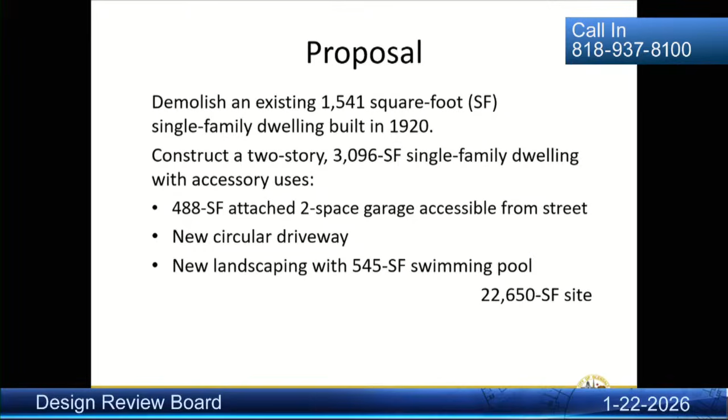The applicant, Helbert Moradian of K&M Engineering and Design, proposes to demolish an existing 1,500 square foot single-family dwelling built in 1920 and construct a new two-story, 3,100 square foot single-family dwelling with an attached 488 square foot parking garage, a new circular driveway, new landscaping, and a swimming pool, all on the 22,000 square foot site.

The project qualifies as a Class 3 new construction exemption pursuant to Section 15303 of the state CEQA guidelines because it consists of one new single-family residence. Additionally, the property and existing residence does not appear eligible for historic designation and is not considered a historic resource under CEQA. The subject project is in North Glendale, La Crescenta Community Plan area.

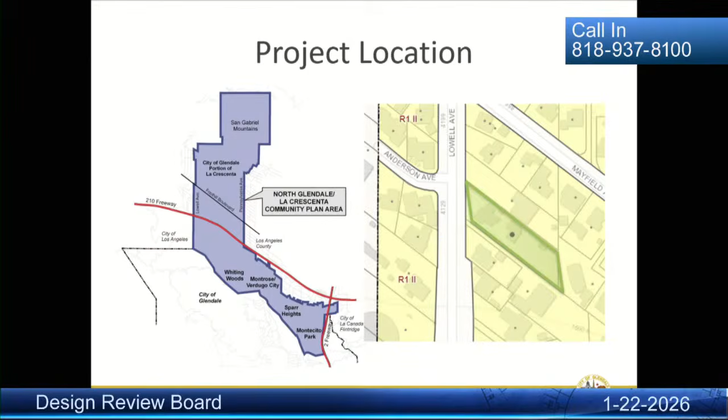The property at 4124 Lowell is in a low-density R1 zone, floor area ratio District 2. The lot features a gentle slope and is parallelogram shaped. The neighborhood consists mostly of a mix of one-story and some two-story single-family residences with varied setbacks, massing, and architectural styles.

The community plan promotes preserving this diversity and neighborhood scale. Looking at the existing site plan, buildings and structures to be demolished include the existing residence, the freestanding and retaining walls, the patio, garages, and driveway.

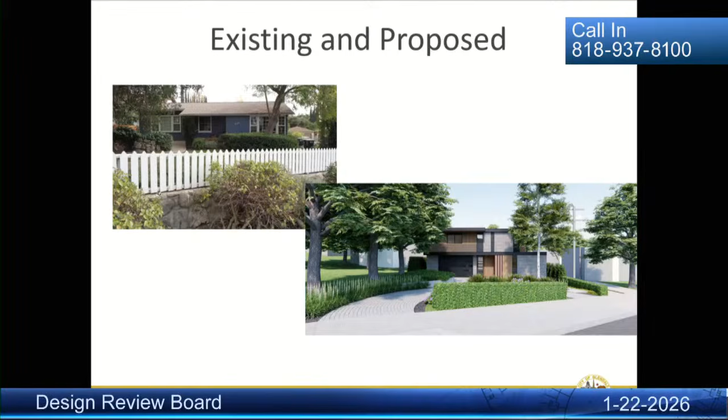Looking from the street, existing and proposed: the existing house is an eclectic style, which blends elements from different historical periods, a trend that began in the late 19th century. The new residence reflects a clean, contemporary style with rustic elements, continuing the eclectic tradition of blending diverse influences. Both approaches complement the neighborhood's character and echo the natural stone aesthetics found throughout Crescenta Highlands.

This is an example of the site plan, which the applicant will get into more detail with, and a preview of the elevation, which the applicant will also detail. As far as determination of compatibility, the staff report outlines this in three ways: site planning, mass and scale, and design and detail. Just a brief summary of the findings in the staff report.

For site planning, the footprint increases by about 34%. The lot coverage increases about 87%, particularly because of the rear deck in the back. The setback is similar—it's a 26-foot front yard setback, so the house is positioned in a similar front compared to the current house.

The design meets the slightly sloping terrain. It's a gentle slope, and structures stay in their original position to minimize grading. There is new landscaping, and there'll be a new swimming pool in the back. It'll be an open front yard with no structures, no gates, no fences in the front.

There will be a circular driveway, but the lot is wide enough to accommodate that, with permeable pavers and such. There will be a 36-inch tall retaining wall in the front yard finished with natural materials. There'll also be a couple of street trees replaced, with oak trees preserved.

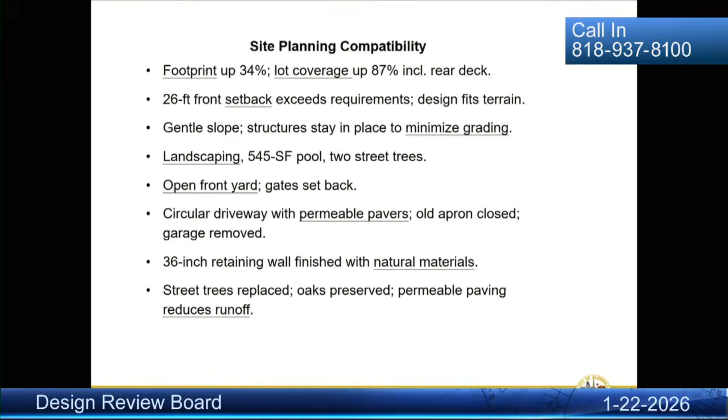For massing and scale, we'll have a two-story home scaled for neighborhood compatibility. The contemporary modern design will have low-pitched roofs and long eaves. It'll follow the slope, with the taller first floor offset by some spacing and setbacks. The massing is softened by horizontal lines and metal fascia.

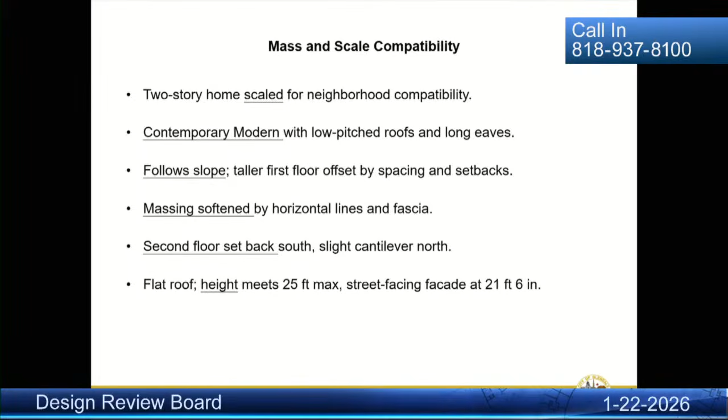The second floor is set back a little to the south on top, and you'll see it slightly cantilevers north for a gradual transition. There's a flat roof design that meets the maximum height of 25 feet. On the street-facing facade, the wall is actually 21 feet high, and it slopes a bit in the back, so the house appears smaller in front than in the back.

In design and detail, there's a contemporary style with rustic finishes - porcelain tile, wood siding, aluminum fascia. These are high-quality materials. The windows and doors have recessed frames, solid wood entry, and the materials are generally composite wood, aluminum, and porcelain tiles.

Outdoor features include a front porch, rear balcony, and a deck on the first floor, all positioned to avoid privacy impacts. There's a circular driveway with permeable pavers. Exterior lighting will be minimal and consistent with the design, and the plans will eventually be updated to show mechanical and utility elements.

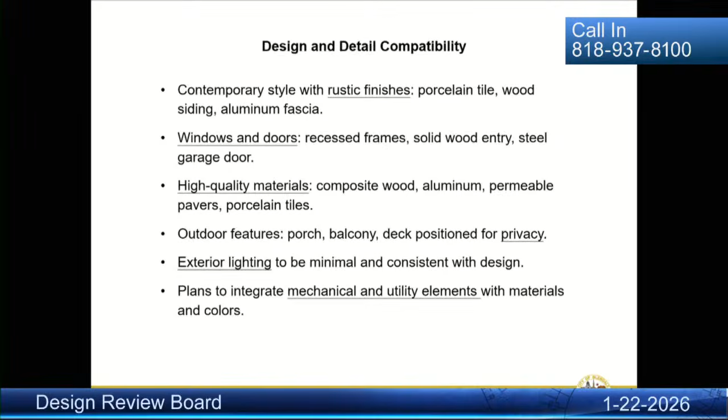There was one comment I received just yesterday. The comment came by phone call - Ara by phone needed to know about the location of the new residence and wanted to be assured that the second floor windows would be located in such a way to avoid privacy impact. I had emailed the plans to that person. That's the only comment received.

City departments provided normal, standard comments, which are reflected in the staff report and exhibits. For staff recommendation, given all the information presented here and in the staff report, staff recommends that this entitlement for design review be approved with the following conditions. Number one, that the applicant complies with the recommendations identified in the comments from the responsible agencies found in the exhibit. Number two, that there'll be some revisions to plans before plan check, involving four items.

Just to make sure that the structures - any columns, walls, fences, or gates - there was some inconsistency in the plans. Some sheets showed them and some didn't, so we wanted to make sure we're consistent with that.

Secondly, that the retaining wall should show natural finishes, like natural stone. Third, that exterior lighting be included, kept minimal and consistent with the style, and limited to entry, egress, and vehicle areas. And lastly, that mechanical equipment, gutters, vents, and utilities be shown and integrated into the design. This concludes my presentation.

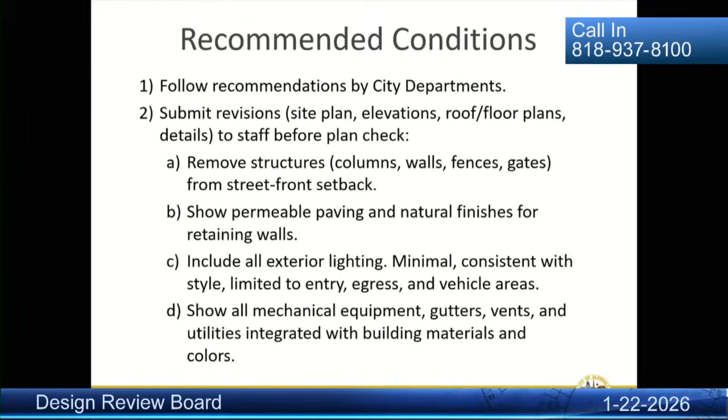I'm available for questions. Thank you. Any questions? I have one question.

Historically, the design guidelines have discouraged circular driveways, so I'm curious on what basis you're saying this one is okay. Can you clarify if that's in the guidelines? I perhaps missed that detail. Is it in the primary guidelines for single family, or is it in the La Crescenta guidelines? I can't speak to La Crescenta in particular, but it is in the generic design guidelines for the city.

I think, as I understand, that's true, and generally we want to discourage circular driveways. In general, our zoning code provides for them, however. Usually lots that are at least 80 feet wide start to be able to accommodate that, because they're wide enough. As long as, in accommodating a circular driveway, it meets the intent where we provide landscaping and an open yard, then that's why I thought we could accommodate it.

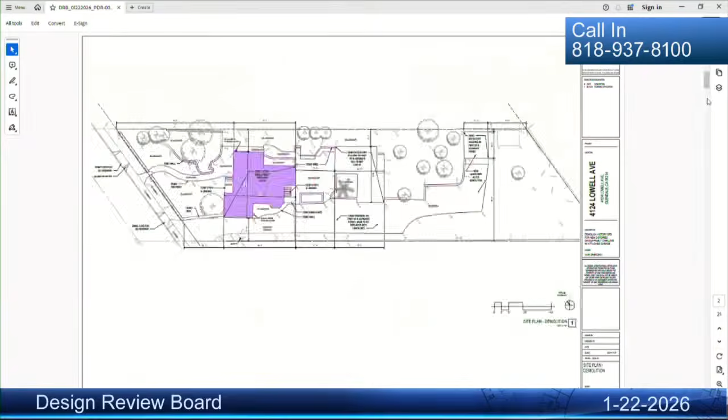Yeah, it says here, front property line 80.59 feet. Can you tell me... well, okay, so that's the length of the facade, but the actual width of the lot is...

Because that's at an angle, if you actually measure from side property line to side property line, it's less. So that's where I'm confused about how we define the width of a lot.

The width of the lot is defined in the R1 zone as the front property line. So even though the lot itself is not that wide, it's defined by that dimension. Okay, all right, that's a good point to clarify though, for sure.

Okay, thank you, thank you. So basically, it becomes a design discussion.

Any other questions? No. Nope. Okay.

We'll go into the public portion now. Let me see, I only have one speaker card for this project. It's Ricardo Mora, is that the only one who's going to speak for this project? Is he the applicant? He's the architect.

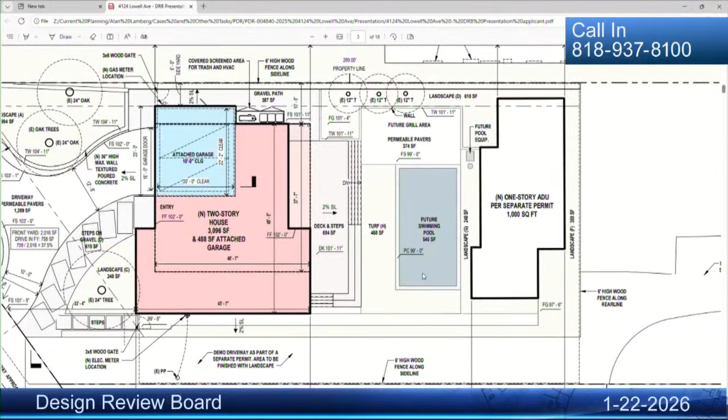Basically, what you see as blue is the garage, and red is the house, and the house on the second floor overlaps the garage. Towards the back, we have a terrace, stepped down to the existing topography where we'll in the future build a pool. The house is built with this stepped layout, so we didn't have to do any grading or build retaining walls. If you go to the next slide, please.

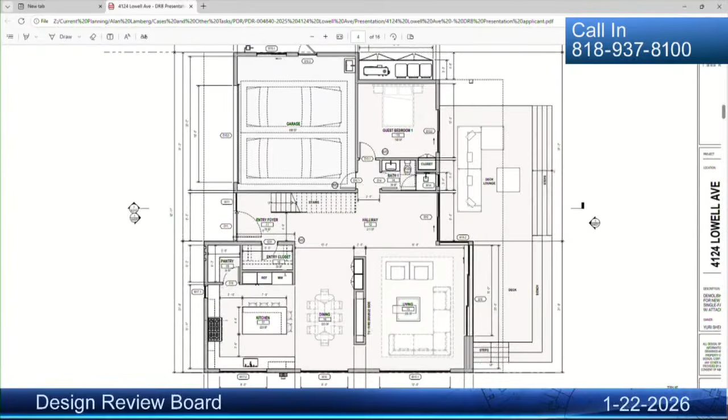I'll go quickly through the floor plans. I want to focus on the renderings, as they illustrate the house better. The floor plan organizes with the garage to the left, to be less visually impactful from the main street. On the center, you have access with the entry, stairs, connecting to the back. On the right side, you have the kitchen, living room, dining room, and so forth. If you go to the next plan, please.

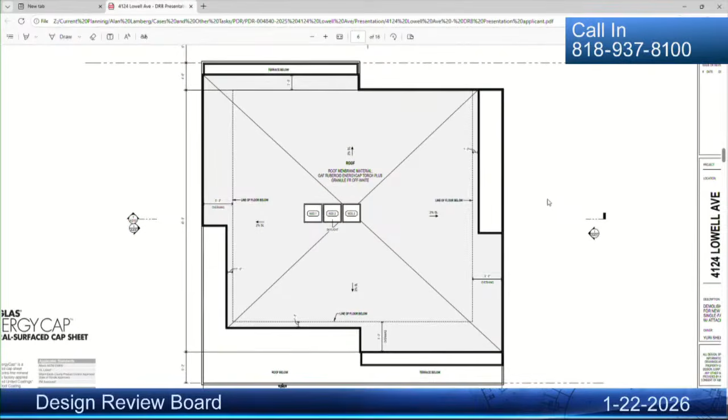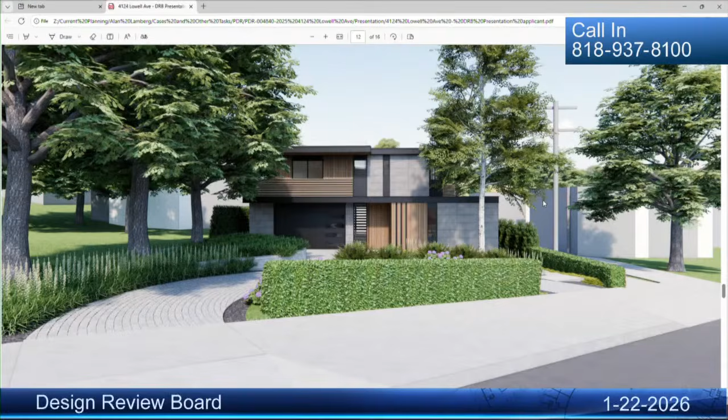I'll conclude quickly. If you could show the rendering of the front. I want to talk about how the house is designed, taking into consideration a 360 design. The same design travels along all sides of the house with the same elements, the same wood material, the porcelain tiles that look like concrete panels, and the metal detail travels all around the same way. If you keep scrolling through the renderings to illustrate that. This is a more detailed view of the entry door. You'll see the entry is more prominent than the garage, which is also behind the overhang, so you don't see it as much.

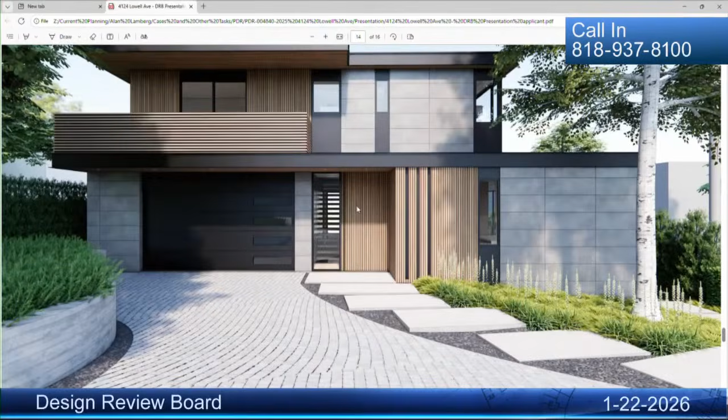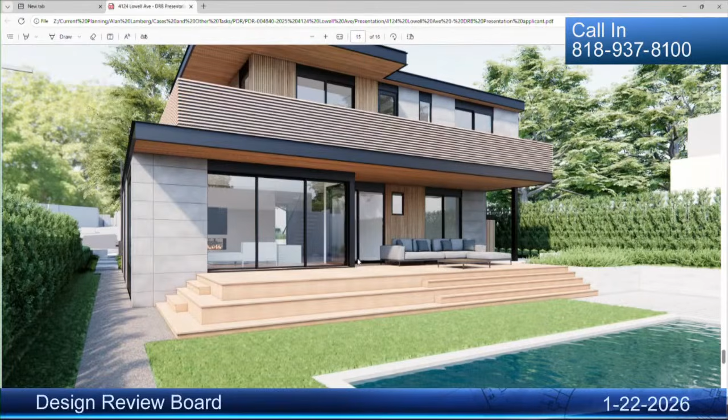Another view of the front. We'll integrate the lighting with this design. This is a view of the back, so you can see it's the same language, front and back. You can also see how the house terraces down to mitigate grading. All the windows have a recessed detail. Although the house has these balconies all around, it's a solid baluster, but detailed in a way that it almost looks open and transparent. Another view of the back. This is the place where we're going to have the trash enclosure and the mechanical equipment, all screened with this wood detail as well.

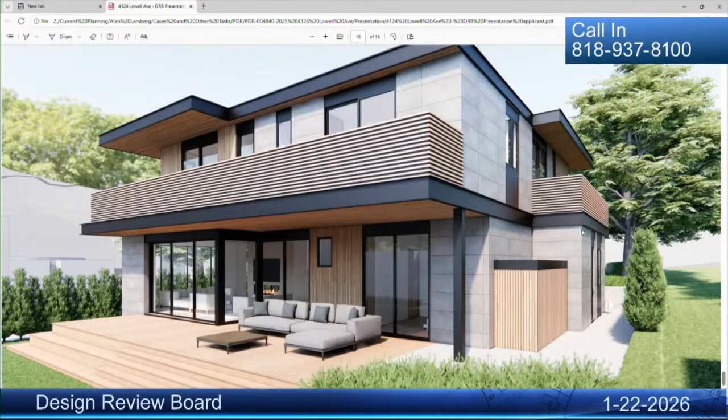So just because you ended with that, the enclosure there, is that going to be permeable so you can actually see through it, or solid with just fluting on it? It's solid. It's open on the bottom for drainage, but it's tongue and groove wood against wood.

So I wanted to talk about the trees. If I'm hearing correctly, all of the oak trees and the other tree, which I believe was a jacaranda tree, are all going to be preserved? Correct. So no removals of any trees? No.

The site plan has everything front-loaded on the lot here, but right now there's a big driveway and a garage in the way back. What's the plan for the way back area? There is a plan for a lot subdivision.

So eventually it'd be subdivided into another property. What about a driveway access for back there? Would there be... It's pretty much the current driveway, which looks just like a walking pathway here, but it's actually wide enough to have a full driveway down there? Correct.

What's the dimension? I can't tell from the plans. We will have the 20 feet required for legal frontage to the street and access for the fire department. We had that on the plans at a certain point, but it became confusing to mix a future project with the current project, so we were asked to take it out. That will be part of a separate application.

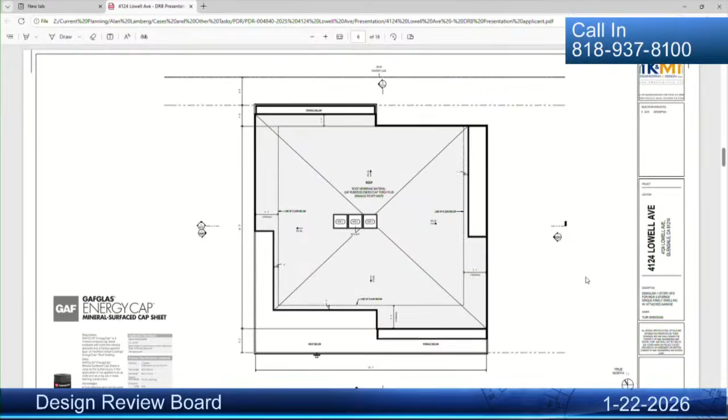As far as the mechanical room area where you have the wood fascia, it's open top, correct? That enclosed space will need ventilation. Yeah, we want to cover as much as we can—it's easier to maintain if it doesn't rain straight in, but we'll need ventilation for the HVAC, the condenser that's going there.

So is the water heater and the condensers going there? Is that what it is? The water heater most likely will go inside the garage. Okay.

We might be looking at not having enough space for all of it. I'm looking at your A200 - it looks like it's the condensers, but it's not identified, so it's kind of hard to tell. We're guessing here. So do you have the trash and the condenser? Is that what it is? Okay, yeah, that makes sense now.

And then a final question regarding the entrance - you're proposing textured poured concrete at the planter. Are you saying this is going to be a board form finish? Is that okay for the retaining wall on the back? So my question is, it's largely an existing wall. We are reshaping it to accommodate the driveway, so rebuilding a portion of it.

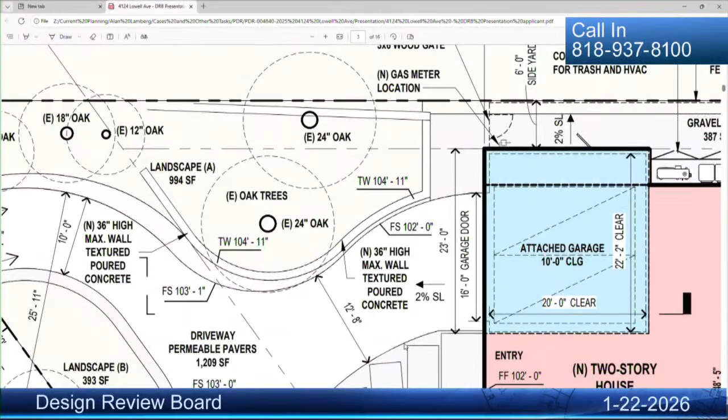Okay, I'm trying to imagine how you can do a board form on an existing wall. No, sorry - we're cutting a portion of the existing wall because we need to push it to a different location, and then rebuilding as new. Okay, yeah, all right, thank you.

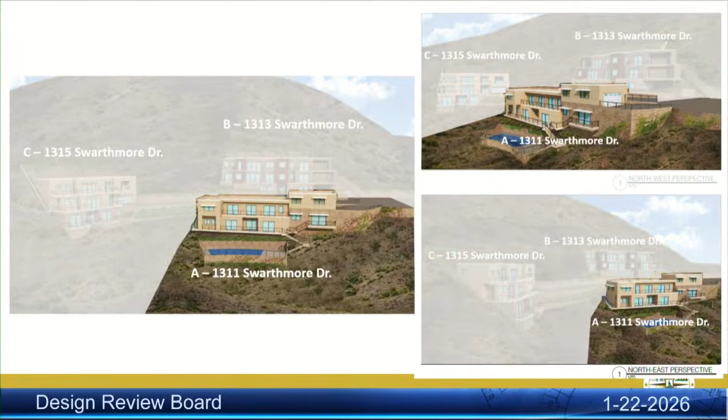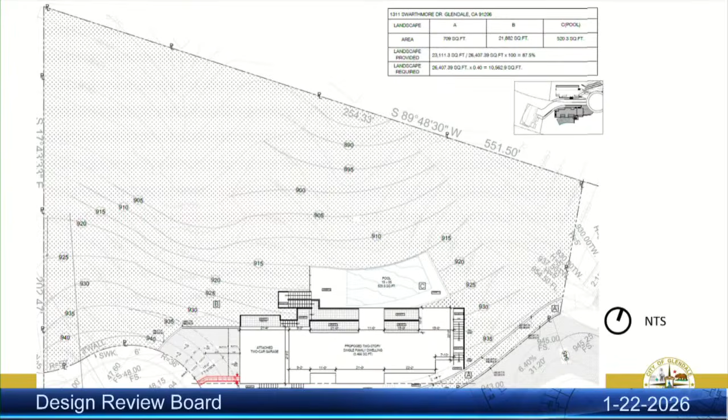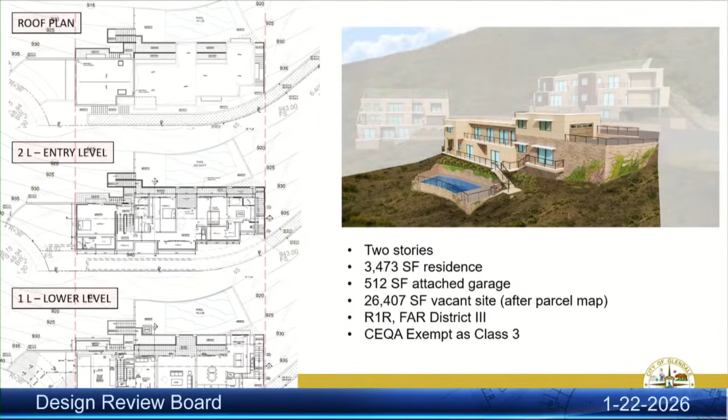Starting with Parcel A at 1311 Swarthmore Drive, it has a downslope topography. The house and deck are terraced to follow the downslope. The site plan features excessive hardscape in the front that staff recommends adding additional landscape to, highlighted in red. The landscape plan features drought-tolerant plants, including coast live oak trees. It's a 2-story residence going downslope to diminish the massing visible from the street.

Here are the elevations. The building itself is 29 feet in total height.

And it's designed with the various setbacks. The entry is well integrated into the design of the residence. It's not monumental, however, the staff recommends restudying the feature to provide a better focal point.

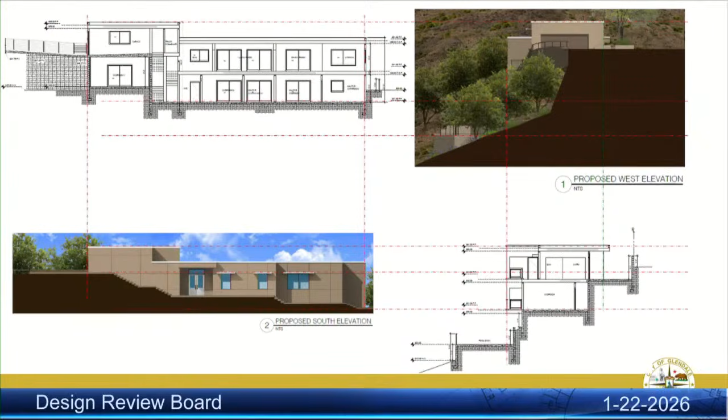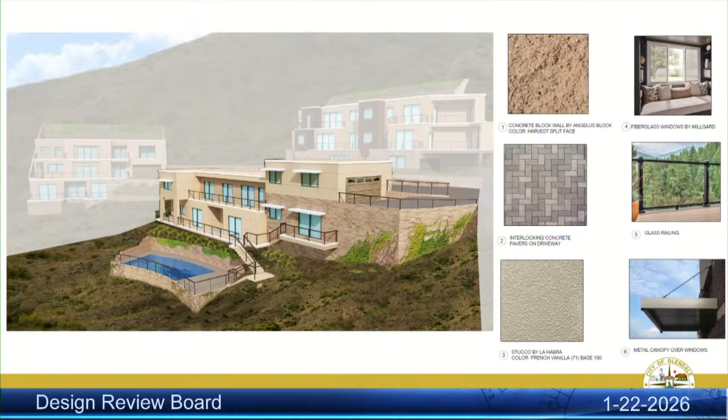Finished materials are of high quality and reinforce the contemporary design. However, staff would recommend some additional information on the stucco color and the additional block material to be incorporated into the design where it's more visible and prominent from the street.

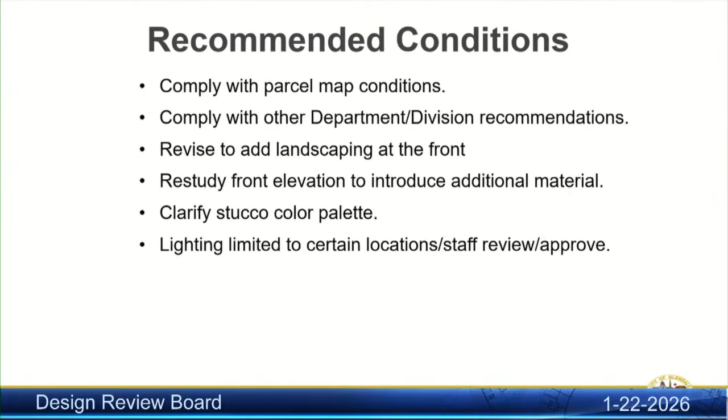So here are the complete recommendations from staff: comply with the parcel map conditions, comply with the other department division recommendations, revise to add additional landscape at the front, restudy the front elevation to introduce the additional material, clarify the stucco color palette, and include lighting limited to certain locations that staff would approve. That concludes this presentation for 1311 Swarthmore. Thank you.

All right, good evening. We're going to transition to 1313 Swarthmore. You mean 1315? I'm sorry, 1315, yes. Speak that one. No, it's, no, it is 1313. Okay, yeah.

So the next item on the agenda is PDR 004510-2025, a review of a proposal. All right, Roger. Yes, over here in front of us, just so we have 1311, 1315, and 1317.

Okay. Where's the? Yeah, so we should have 1317, should be, I'm assuming, is typoed to 1313. Basically, is it the one at the back, or is it the higher side? Sorry, let's jump to Alan then. Okay, well, yeah, let's jump to Alan.

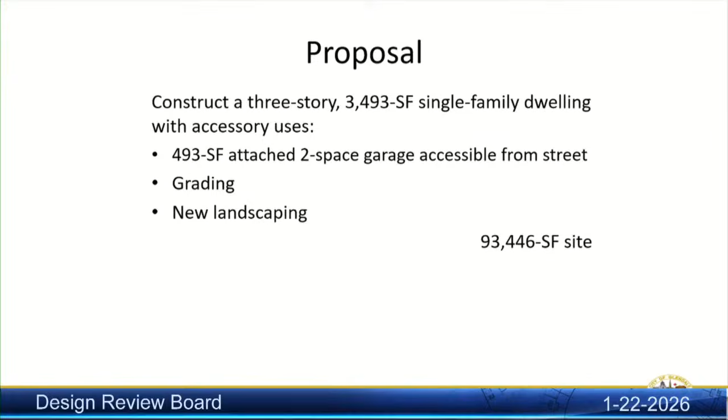The applicant, Edward Hagobi and Associates Architects, proposes to construct a 3-story, about 3,490 square foot single-family dwelling with an attached 490 square foot 2-space garage. That includes grading and new landscaping, and this parcel is a 93,000 square foot parcel, or 2.2 acre site. You'll see that is the larger parcel of the three. The project qualifies as Class 3 new construction pursuant to CEQA guidelines because the project consists of one new single-family residence.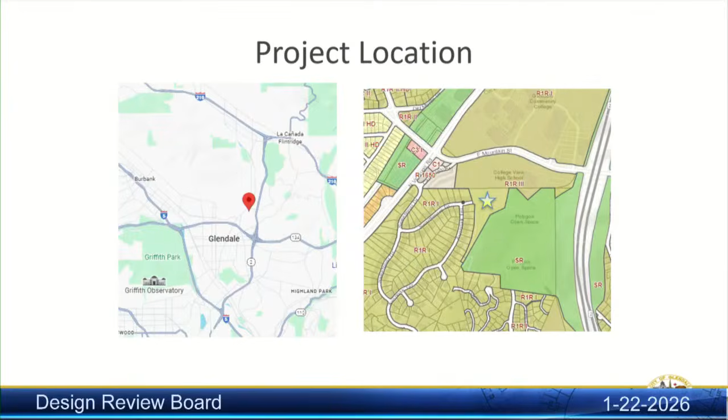That location, as Eric said, is also near Verdugo Road, Mountain Street, and College View School. Eric already detailed the circumstances of the vesting parcel map. This project is also known as Parcel B, and it runs along, adjacent to the properties you see on the bottom of the screen here.

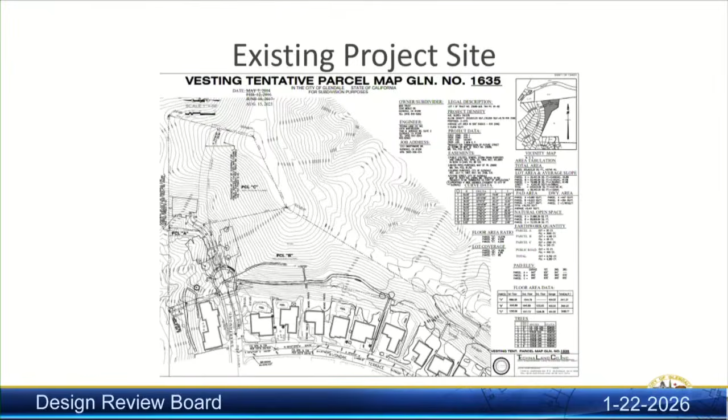So now this orients us to this property here. As you can see, it is the larger of the three, because it contains a lot of open space along that side. All three properties are in the restricted residential R1R zone, floor area District 1, and this one is also an irregular shaped interior lot with an average current slope over 60%, and access will be provided by a new 18-foot wide, 32-foot long driveway.

I'm sorry, can I interject here? Because those plans are referring to the plans that I have here for 1317 Swarthmore, not 1315. So, okay, Roger, you want to? I think there is a typo on the plans, 1317. Yeah, everywhere. Yeah. Are the plans showing this house? Yes, yep. Labeled as 1317 for those plans.

Okay, so I think there was a typo on the agenda. Okay, typos on the agenda. Okay, I just want to make sure the subject property for the public viewing, in terms of the cases here, this is 1317. We're looking at the actual plans for. Okay, correct, so this is 1317. What I spoke to and then we shifted was 1313. Okay, so sorry. And that would be, there's 13. 1313 here shows, I'm assuming 1315, because I have 1311, 1315, and 1317. And 1315 should be 1317. And then 1317 should be 1315. Let's just...

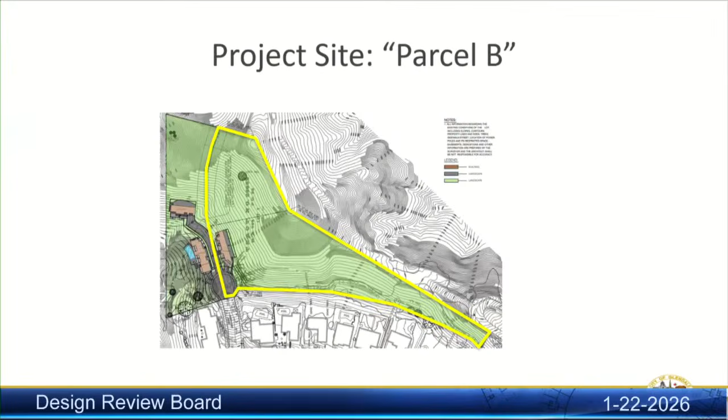For this property, the pedestrian access to the front entry, as you can see in the site plan, the stairs are in the front there.

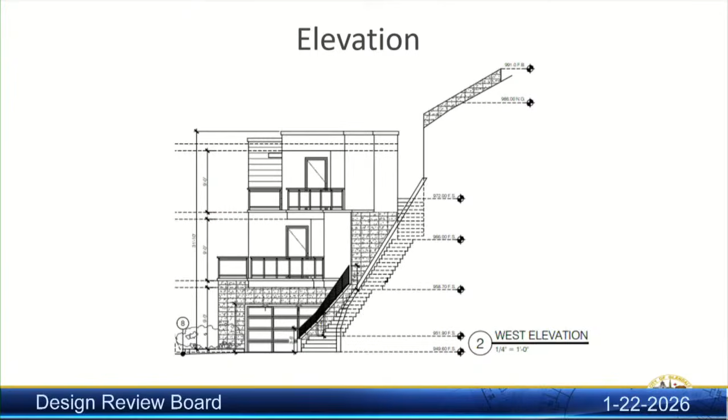The elevation, as seen from the cul-de-sac, shows the driveway below with a total of 3 stories and the retaining wall on top. That stairway is the egress, the exit stairway in case of emergency.

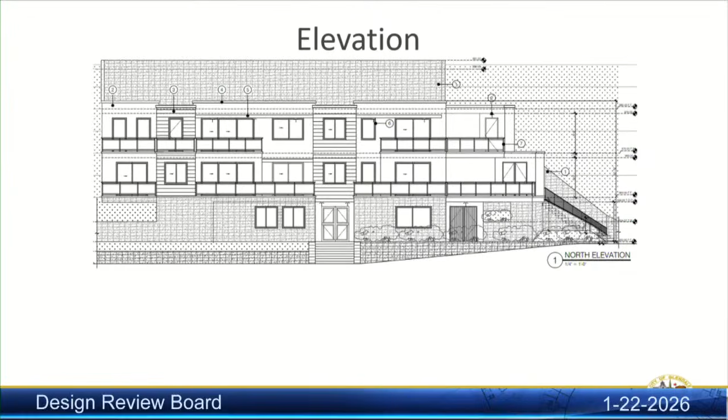This is the side elevation — correction, not side street, it's interior, but it faces that common driveway that leads to the other property, and this shows the pedestrian front entry.

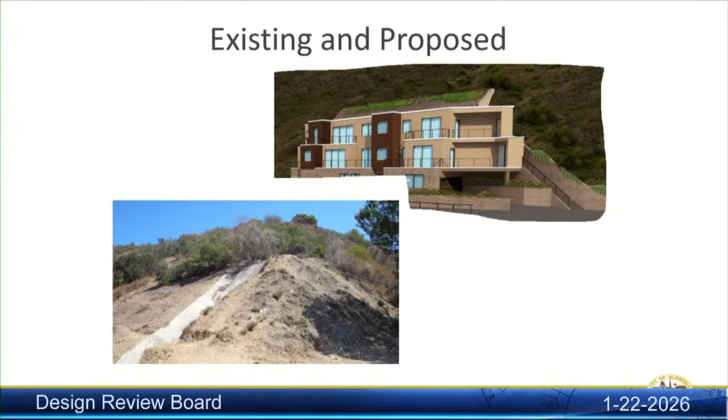While the architectural style differs from nearby homes on Swarthmore Drive and Avon Oak Terrace, its siting deeper into the College Hills hillside allows for a new architectural context, where every project has a sort of sunset view from the balcony.

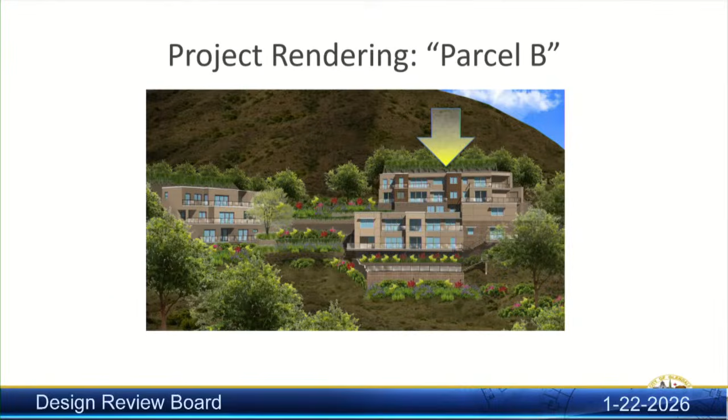In determination of compatibility, we talk about site planning, mass and scale, and design and detail. I'll briefly summarize my findings for this project. It has a compact footprint on the property which follows the slope, minimizing grading as much as possible, although there is significant grading, but in the context of the entire property, that's the effort to minimize.

The front yard does stay open. The driveway and access are separated by a landscaping buffer. The garage is set back sufficiently, reducing that street massing. We're having the applicant use decorative paving for the pedestrian walkway.

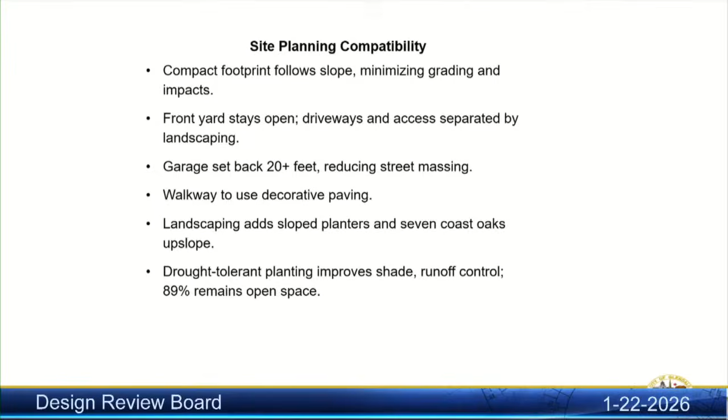The landscaping adds sloped planters and 7 coast live oaks upslope, and there's drought-tolerant planting to improve shade and runoff. By my calculation, 89% of the property remains open space.

For mass and scale, it's compatible with the neighborhood pattern of 2-story homes, but with articulated massing. It's a different style, but the hillside siting creates a new context. It relates to 2 concurrent projects today with similar terraced schemes.

The mass is broken up with varied planes, recessed volumes, fenestration, and balconies. The rear retaining wall, required by safety code, has color and landscaping to soften its appearance, and the parapet roof is articulated with projecting volumes of varied heights.

For design and detail, it's a contemporary style with tiered forms, varied finishes, and metal details. There are consistent windows and doors, with recessed frames that add depth to the fenestration. The front balconies create no privacy impacts relative to the neighborhood.

The driveway uses pavers and will require decorative paving in the setbacks. The exterior lighting shall be minimal and style consistent, and the plans will have to show their mechanical and utility elements integrated. I had received one comment, so let me mention that here.

I think I just wrote it. Actually, I just had the conversation earlier.

We had a comment from a neighbor who was concerned about fire hazard — oh, thank you, Roger, because I wrote it down. The comment came from a neighbor who lives in the neighborhood and can see the property from their house, and was concerned about potential fire hazard, loss of scenic view, and wildlife and botanical habitat. That is all the comments I received.

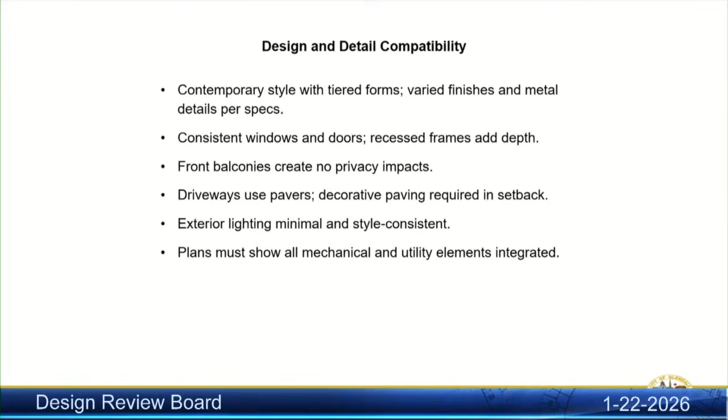Given all the information presented here and in the staff report, we recommend that the project be approved with the following conditions: one, to comply with the conditions of the vesting parcel map decision; to comply with all recommendations and comments from responsible agencies such as urban forestry and building and safety; and to revise plans before plan check in 4 ways.

First, material differentiation — Eric had mentioned that as well — to vary color and finish placement from the other 2 concurrent projects, and to provide further specifications for the metal details.

That the driveway and walkway add decorative paving in the setbacks and for the private walkway, and to limit lighting fixtures to the garage, entries and exits only, ensuring consistency.

And lastly, for utilities and equipment, to show all mechanical, gutter, vents, and roof penetrations to make sure they're integrated with the design. It's a very standard condition we typically have.

With that, that concludes my presentation. I'm available for questions as well.

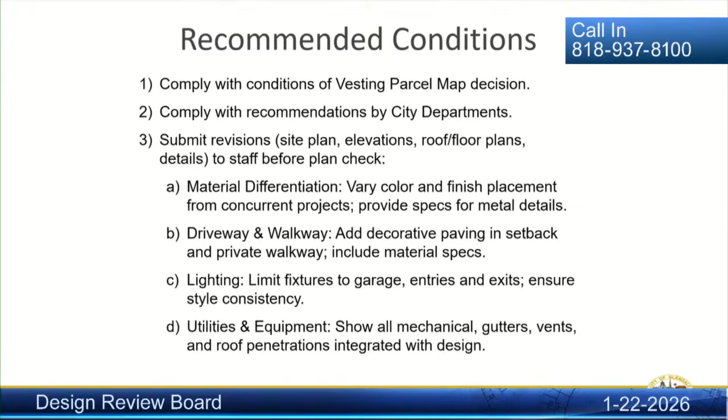And now for Roger's presentation. So... There we go. Okay.

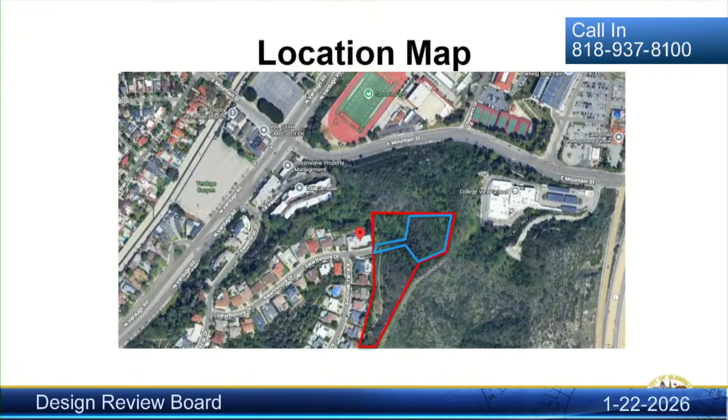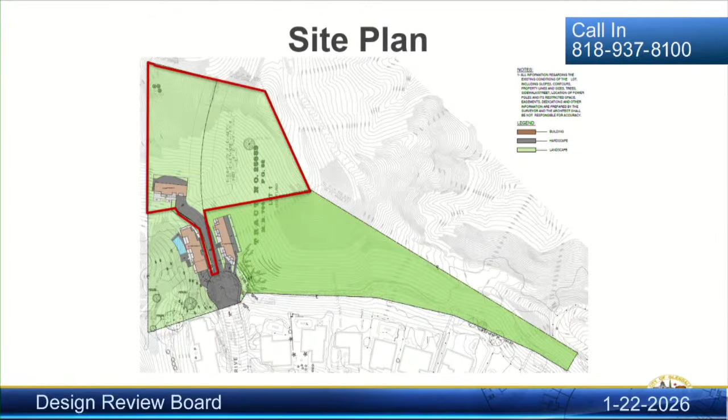I'm going to go over the next number of slides pretty quickly. Location map, which you've seen a couple times, street view, site plan. If you'll notice, the site is outlined in red, and the house is really located in the south, sort of west corner of it. This is the west or the front elevation, north elevation, south elevation, and then the rear or east elevation. A couple project renderings showing all 3 houses, looking like from the Verdugo area.

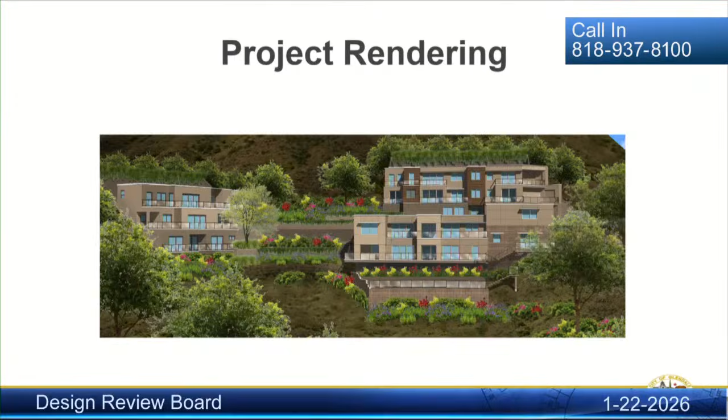So generally, the site planning for the project is acceptable. As mentioned in the staff report, the proposed residence is located in the northwestern corner of the future site, which significantly limits the amount of grading to access and accommodate the house. The remainder of the lot is going to remain natural in its natural state. Much of the usable outdoor space is in the form of the front-facing balconies, although there is a rear yard.

And that is best shown here. You can also see the first floor balconies here, the second floor balconies here, and then the third floor balconies up here. The front-facing attached garage is consistent with the neighborhood pattern, and proposed landscaping will soften the appearance of the proposed built environment. Native oak trees are proposed near the residence, and rosemary is proposed near the retaining walls, which will sort of billow down and soften the walls.

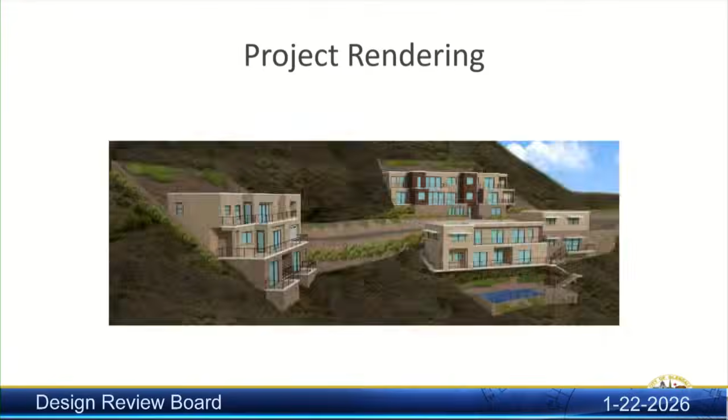So, with regard to finished material, the finished materials are of high quality and again reinforce the contemporary design aesthetic. One of the conditions related to design and detailing is that light specifications should be submitted to staff for their review and approval.

So staff is recommending approval of the project with 7 conditions and 2 considerations. These include, I'll go over them briefly: compliance with the conditions of the vesting tentative map, compliance with other departments' comments, the applicant shall amend the material board to include the front door material, or what the front door is going to look like. And then the style of the door should be reviewed and approved by staff.

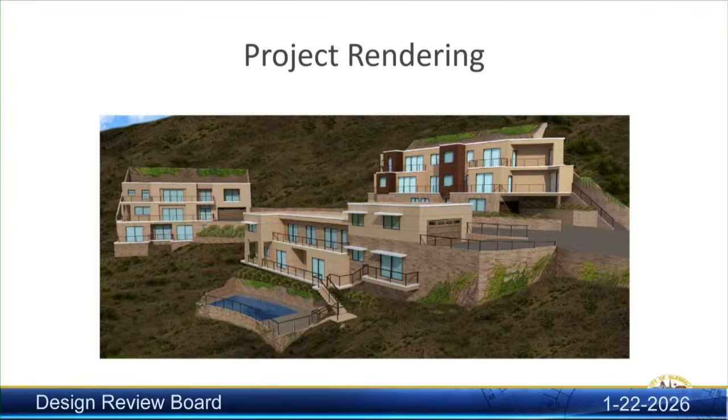The fourth comment, that the applicant shall restudy the front elevation of the residence to incorporate additional split-face block on the facade or introduce a third facade material. And then all facade material shall wrap around exterior walls and terminate appropriately. This was most apparent on the front elevation, where the garage is faced in split face, and then the lowest level is split faced, but staff is suggesting either more split face on the more visible elevations or a third material be added.

The fifth comment, the applicant shall clarify the stucco color palette and amend the material board if the stucco is proposed to be in more than one color. Stucco shall be smooth or trowel finished.

The elevations sort of suggest there'll be two stucco colors. They have some shadow lines, but the material board only showed one stucco color, so just clarification on that matter.

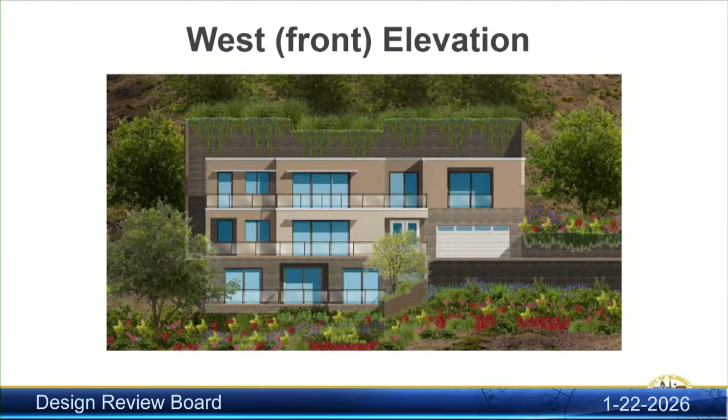A condition, as I mentioned, on the lighting. Condition on the mechanical equipment to be shown on the amended site plan and shall be screened from view from the public right-of-way. And then two conditions.

Or two considerations, I should say. Consider restudying the entryway of the proposed residence, with changes in color or facade treatment which better highlight this area as a focal point. And then consider restudying the color palette of the residence to provide more color contrast.

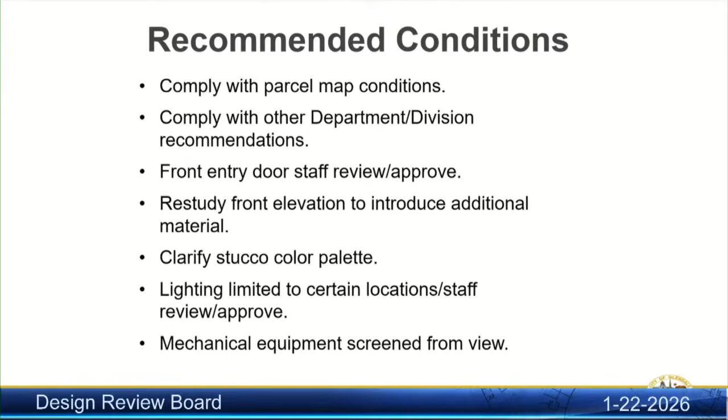If you'll note, the split face block and the stucco really are very similar in color. So that concludes my presentation. If the board has any questions of any of us, we're happy to entertain them. Thank you. Does anyone have any questions?

I have a question regarding one of the comments we have here from the public, by phone, about a potential fire hazard. I just wanted to check with staff—it's not within our purview. I know the fire department goes out and does their own reporting, correct, if I'm not mistaken? Correct, yeah. What else do they do, just so the community has a better understanding of that?

Yeah, what they will do in the plan check phase is they will look at landscape plans, they will look at access around the site, they'll look at the proposed common driveway and make sure they've got adequate access. Okay, yeah, all right. So no other questions right now?

We'll go into the public portion. I have a couple speaker cards over here, and just to remind everyone, the applicant and the architect gets 5 minutes, and then everyone else gets about 3 minutes. First we have the applicant, Edward Hagopian. If you could please just say your name for the record, sir.

Edward Hagopian. Thank you. I'm the architect of this project, and looks like there's a lot to say, but I'm trying to simplify that as much as possible. My main intention with this hillside project is to do the second floor and third floor setbacks so that we don't see a straight facade going up.

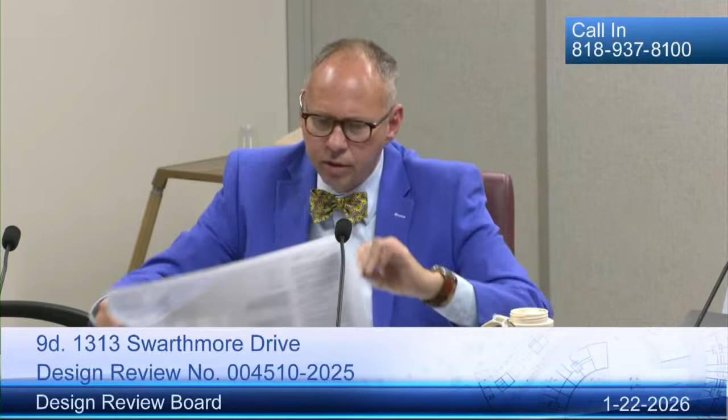Okay, could you clarify for me one of the things—in this rendering, I see this project here, this house, which I think is parcel B, seems to have a very contrasting color in these two vertical column forms. None of the other homes have that, and I don't see anything similar in the material board. It was referenced as Hardie board siding in the elevations.

Okay, that's siding, a different color. Okay, so it is a different color, but I don't see it on the material board that was presented for all the projects. Okay, we'll include that. Okay, so it is a darker contrasting color. Yes. So this one project has a variation that is different from the other two? Yes. Okay. All right.

By the way, regarding the address, the original address was 1311, 1313, 1315. But the owner didn't like 1313, so we changed it to 1350. We're working on that on our end. Once the parcels get finalized, our addressing people are aware that's going to shift.

So the owner likes modern style, I understand. Modern style often features flat roofs, but not always. There are many different styles of modern homes with slanted roofs, shed roofs, even curved roofs. Could you put any consideration into varying up some of the forms? The reason I ask is because when I look at these elevations, which will be visible from all the houses across the valley since there's a hillside right opposite, it looks a little office building-y to me.

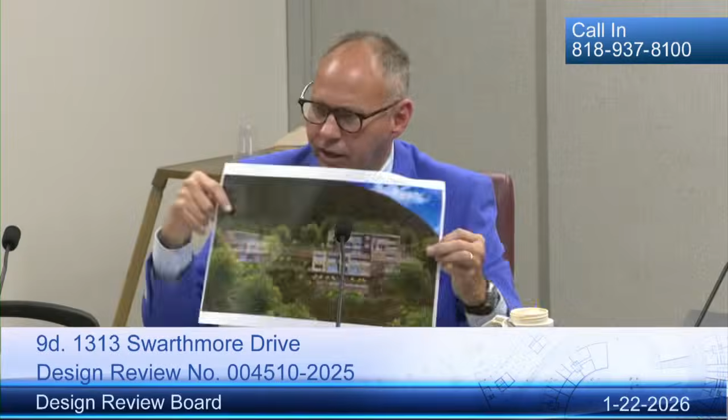Oh, so the two different elevations, the two different renderings I'm looking at are different. Yeah, this is the more correct one with the glass railings. Okay, because this one looks like wire cables.

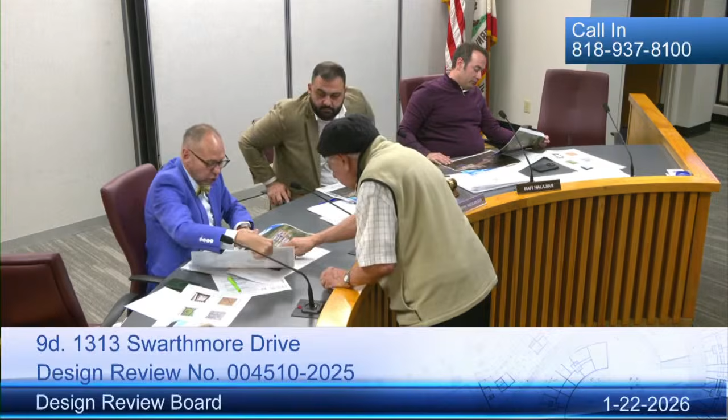We have glass railings here, see? But these are all glass railings. Okay, I hear you, it's just that to me they look like shiny cables, not glass. Yeah, these ones are glass, those other ones don't look like glass, but that's fine. I accept the clarification.

That's it. Member Halajian? Mr. Hagopian, just out of curiosity, have you guys done a study on how much earthwork quantity is going to be involved? That is something our engineer will comment on. Okay, thank you. Any other questions, Board Member Halajian? No. Okay, thank you.

Okay, next we have Haig Martirosyan. If you could please state your name for the record. Good evening, my name is Haik Mardirosyan, I'm the civil engineer of this project.

I've been working on this project for the last 12 years. I got to the point that the parcel map was approved a year ago, and we are in the county right now to get our final map recorded. Just to answer the question about fire hazard that one of the neighbors was asking, there is a code requiring fuel modification around the hillside area, cleaning maybe 100 feet away from each house every year.

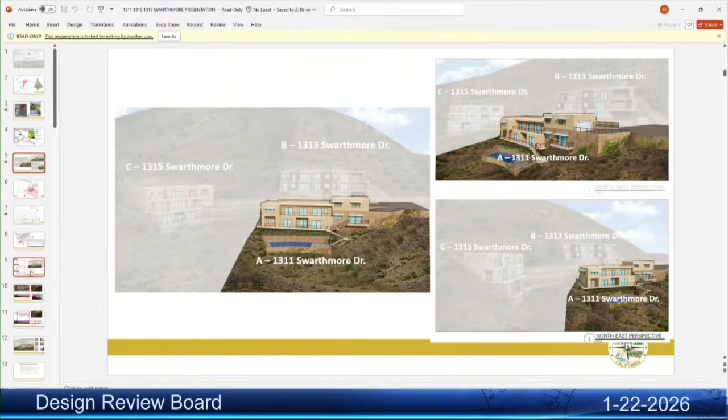As far as drainage, what's the plan? You're creating a lot of flat surface. Based on the stormwater mitigation requirements in California, we have to maintain most of the water within our property. I'm proposing rain gardens within planter boxes for each parcel, collecting their own rainwater and keeping it within the property line. The overflow will be sent to the street. In case of a 100-year storm, we are designing for the 85th percentile, which is a bit more than a 50-year storm.

So we're collecting everything. On each parcel, they will have their own mitigation measures. But I guess it's not in the purview of this committee. I wish we also have to be cognizant of the neighbors, because I heard a comment saying that even though the aesthetics of the structures are kind of irrelevant to the neighboring properties, the water is, and it's going to end up in somebody's property, if I understand correctly.

There is an area where we can infiltrate into the soil rather than taking every bit of water out, but it does depend on the type of soil this site has. If it doesn't allow us to infiltrate, then we don't have any choice but to send the water out onto the public right-of-ways. So my main concern was just to maintain all the water within each parcel, within their own site, and then we'll see what the overflow is going to be, and then we'll take it out.

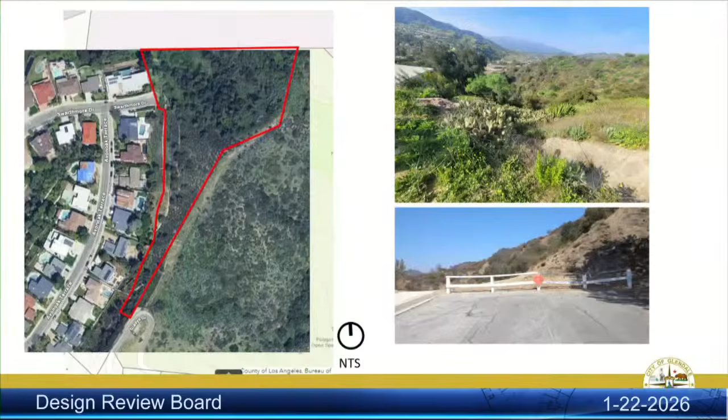Because this basically is a flag lot and the access is only 18 feet. If there's a fire, especially being next to all these bushes and everything out there on the hill, you can't get more than one fire truck in there. And if they want to get out, they have to reverse out. That's a huge problem. I haven't seen the fire department's actual approval before we go and talk about stucco colors. Where's the fire approval to bring in fire trucks as necessary to protect these three homes?

That's number one. Number two, these are not small homes. They're 3,500 square feet. You're not going to have one or two people living here, you're going to have big families, and each one is going to have 4 to 5 cars. Where are these cars going to park? You have an 18-foot driveway, you can't park in there. Where are you going to park? That should be doubled, tripled, so fire trucks can come in.

And I'm afraid this isn't able to be supported because it's being forced. They had to do that because of the grading and all the different angles and aspects to make this work. Of course, I don't blame them, they're developers, they want to get as many square feet as possible because each one is a dollar sign. So to conclude, I don't know how much time I have left, but a helicopter view, which I don't know why we don't have, is very important for you and for me to be able to present my view here.

Alan, if you can go back, I think the first presentation we did, it was... You mean a view of the vesting parcel map? Well, just a shot of the top view. If you're in a helicopter looking down, what do you see? Like a satellite view. This is the first presentation, so let me just go through it. Tell me to stop when you see what you want. That one?

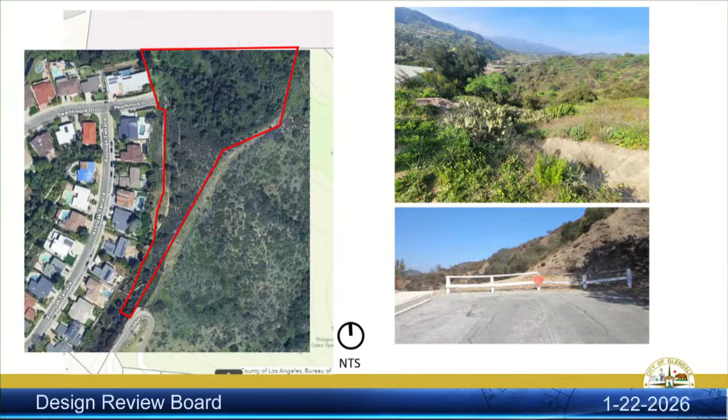That's all we have right now. Could you go back like five? You had one shot that was pretty close. It was a drawing, not an actual picture, but... Yeah, this one?

That's 18 feet wide. Where are these people going to park cars? They're all going to be at least 5 cars per home. You can't park in that 18-foot driveway. Where are they going to go? And if a fire truck comes in, again, where is the fire department's approval? In case there is a fire, you can't get more than one truck in there. We need to have that approval before we go any further.

Yeah, okay. I think that this should be all put aside until you get an okay from the fire department. Thank you, sir. 18 feet doesn't cut it. Thank you so much for your time.

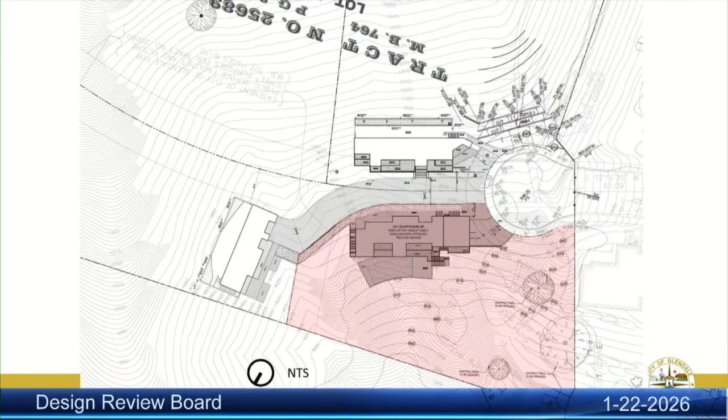They set a strong precedent. The Glendale City Council explicitly rejected development in this exact area in 1993, after hours of public testimony and careful review. That decision was not procedural, it was substantive, based on land use compatibility, environmental sensitivity, and community impact. Approving even a reduced version now undermines the authority and reasoning of that prior decision. This was not only community opposition, but city planning staff recommended against this project at the time, signaling that the site failed to meet accepted planning safety standards.

Those same physical constraints, steep terrain, access limitations, and environmental risks have not changed. In fact, they've gotten worse. Since that time, we've had several major fires in this area. The ridge-line hillside raises persistent concerns: slope instability, increased landslide and runoff risks, fire access and evacuation challenges, and impact on wildlife. The grading, limited road access, and utilities permanently alter the hillside, creating risks. There have been no new justifications presented, no evidence of new environmental studies overturning the past findings. In fact, as I stated, there have been several major fires in that exact area.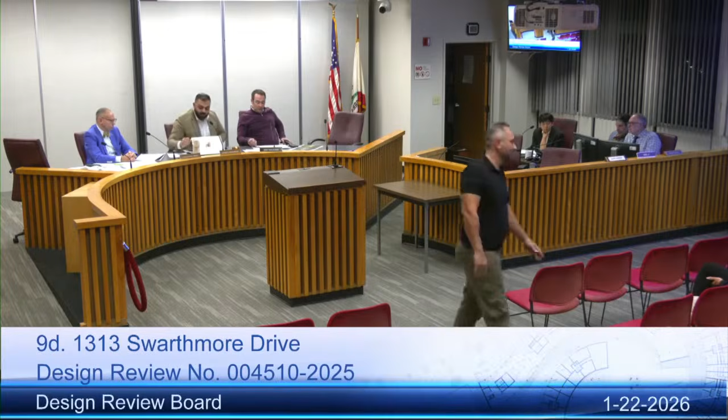Thank you so much. All right, I wanted to see if the architect or the civil engineer had anything they wanted to bring up as a rebuttal, and then we're closing it out for the public portion. Hi, once again, Haik Mardirosyan, I'm the engineer.

Before we started this project, we met with the fire department. Based on their recommendation, we created this cul-de-sac, big enough to have a turnaround for their fire engines. We have a 70 feet diameter cul-de-sac. Usually they have 60 feet, so they asked us to increase it to 70 feet, so we have enough area for their engine to turn around.

Besides, the long driveway that we have for parcel C has a turnaround of its own, so I don't see any problem with the fire engine going back there. Besides, all these new homes are going to have fire sprinklers. The old houses didn't have fire sprinklers. These new codes require that all newly built houses, especially on hillsides, be fire sprinklered.

I don't know why these people are, I know they're concerned, but it's nice to have an open space for them to trespass on other people's property and walk in the morning and in the afternoon. Well, all of a sudden they see there's a new building there, they don't like it.

Of the houses that I have designed, we have two types of trash enclosure location - either it's inside or outside. Both ways work. But inside is typically inside the garage, right? Either inside the garage or next to the garage, some kind of extra location you can use for that purpose. These are minor things that can be taken care of with different solutions.

I understand. Okay. Thank you, sir.

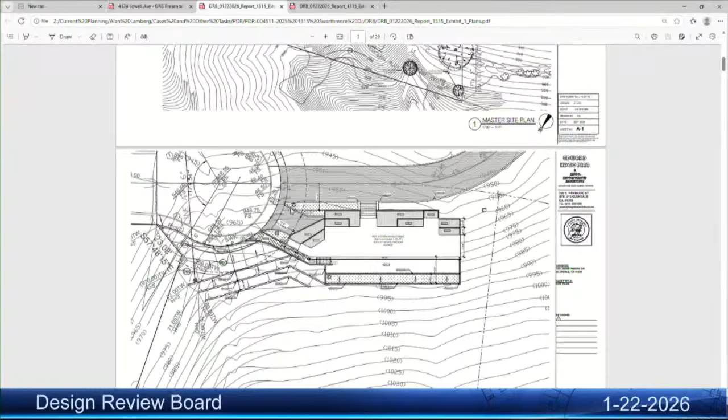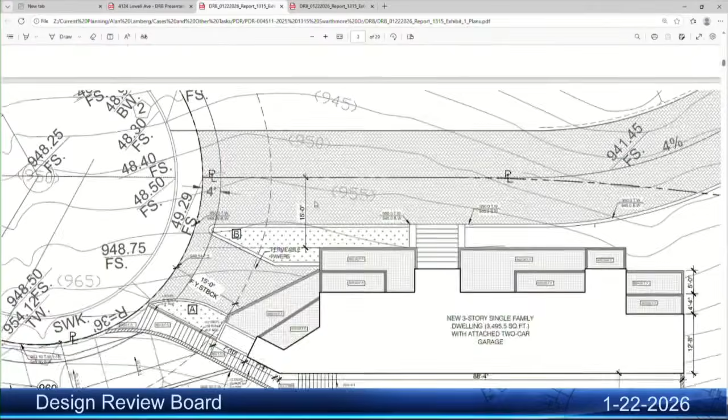This is the only exhibit that I could find that helps us understand the width. This line is 15 feet from the center line of the driveway to the wall of the house, because I think that's supposed to indicate like a... No, the page you were just on, which I think was above it, I saw a reference to a 20-foot width.

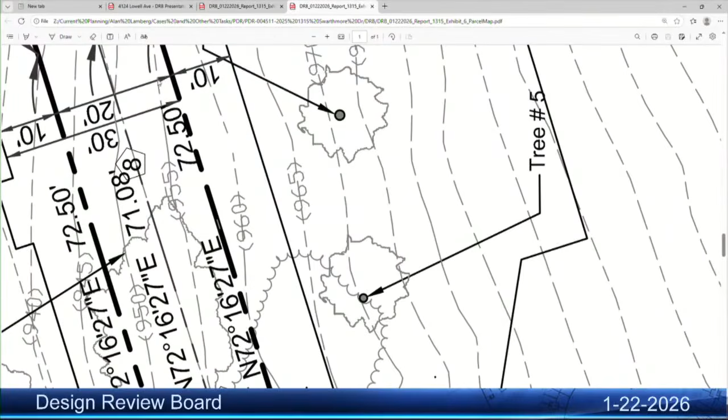No, it wasn't that one. Because the... Right, yeah, right there. Well... Yeah, oh right, here we go. Yes, it's 20 feet - that upside down figure indicates 20 feet. That would be planned for common access, my understanding. Yeah, that would be the required width for a driveway like that. Okay, that's, yeah, as per the parcel map. And I think that is consistent with what the plans ultimately show for that common access driveway, for the width of it.

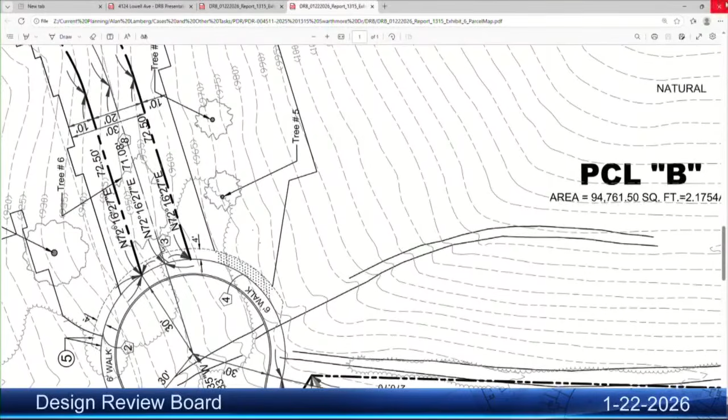All right, thank you. Any other questions for staff or any other questions?

I guess I'd like to talk to staff about this testimony about the city council rejection of this height back in 1993. I mean, this is kind of outside our purview, but I assume this was something that came up in the planning commission when the parcel map was approved. Can you speak to that a little bit? Do you know what happened there? I'm actually looking at the staff report now. None of us were involved in that parcel map. If you can give me a couple minutes, I'm going to scan the staff report.

Please do. Okay, and maybe a question to Alan - why is an EIR not required for this site? It is not. The reason being, in urbanized areas, up to three single-family homes can be exempt from CEQA. Okay.

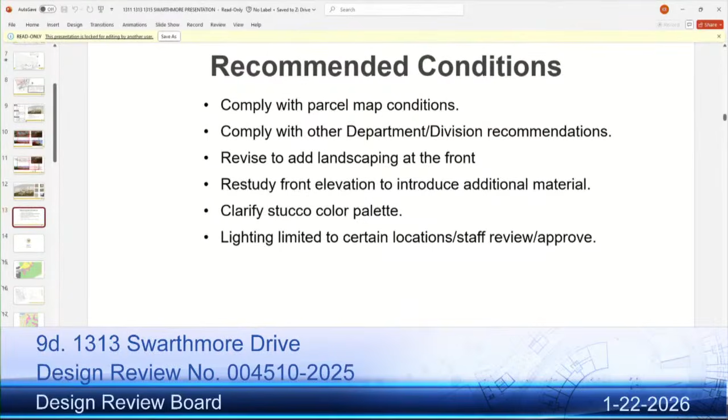Restudy the front elevation to introduce additional material. I would probably add to that: restudy roof forms to potentially consider varying the massing and differentiating it from the other properties. And then relocate the trash enclosure, which is currently inside the home, to a more appropriate location in the garage or outside the home. Otherwise, I think all those other conditions that are there are okay. So these conditions are fine with two other conditions: restudying the roof forms to vary the massing and differentiate it from other homes, and then relocate the trash.

Sorry, wasn't on mic. Did you hear me? Yes, yes, we heard you. Okay. All right, anything to add on parcel A? No, okay.

So, Parcel B. Okay, so, yes, if you could please pull up the conditions for parcel B. Mine's at the end, my presentation's at the end. So yeah, it'll be at the bottom. There you go.

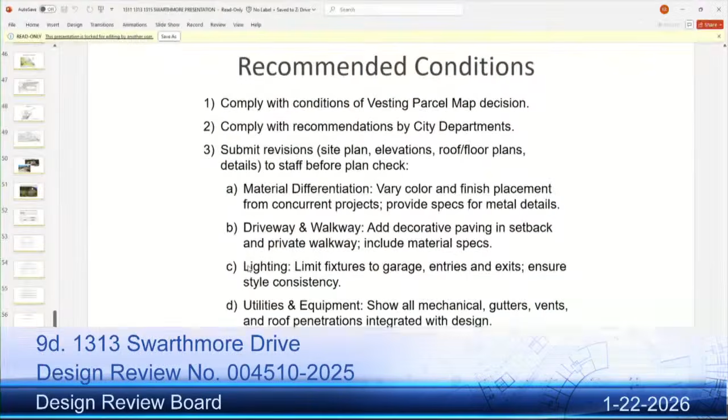I think those conditions are fine, but since we're looking at a return for redesign, I would add that the front entryway and access way could be improved. It's a straight staircase with no transitional zone right up to the front door, and to me that speaks very corporate. I think the applicant could do something more interesting there.

Also, the same conditions we talked about for parcel A apply here, potentially studying varying roof forms to help differentiate this house from the others. Any comments on that? Yeah, I think that's good.

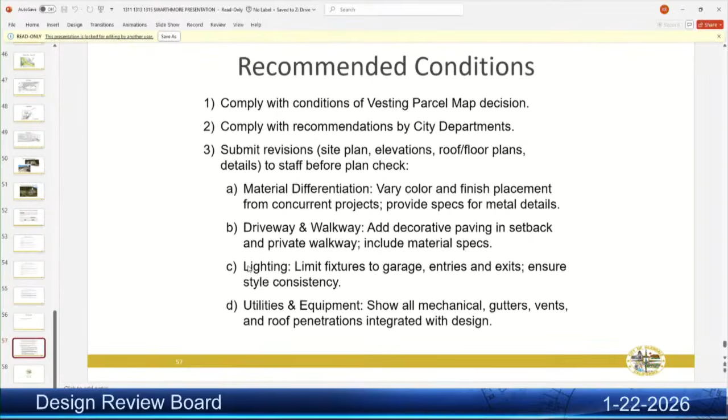So with site B, the three conditions are fine, along with an added one of restudying the front entry to create a transition zone, making the area more interesting and less corporate. And then restudy the roof forms to vary the massing and differentiate it from the other homes.

Conditions for the next one will be in the middle of the presentation. So we'll move on to... great. Okay, so now we're on parcel C.

I think the current conditions already include that. We would just add to potentially restudy the roof forms to create some areas of differentiation, as well as the additional material or colors. So, restudy the front elevation to introduce additional material, and/or color.

And then also on C, the trash enclosure, as I pointed out in the plans, is not practicable because there has to be a staircase there, so we have to find a new location for the trash enclosure.

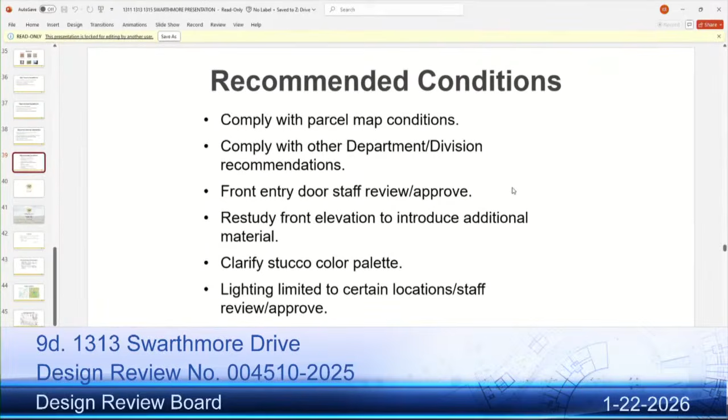Anything else to add? Nope. Okay, so for C, these recommended conditions are good, with the amendment of restudy front elevation to introduce additional materials and/or color, a new condition to relocate the trash enclosure, and also the restudy of the roof forms.

Do we need to do anything regarding site drainage, or is it not in our purview? That will really be looked at during the plan check phase with Building and Public Works.

I did hear during your deliberations some discussion that parcels A and C should have additional finished material. So would it be appropriate... I think the conditions already included reference to that. So we'll be sure that when we say restudy, we're not just restudying the roof forms, and when we say differentiation, we mean not just colors but potentially finished materials as well, to help the applicant create a sense of differentiation between the homes.